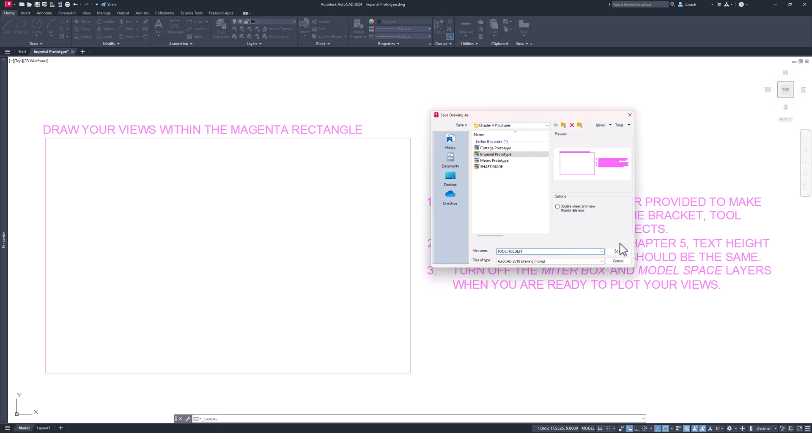The first thing you want to do is save this as - I'm going to save this as tool holder. Hit save here. And then I'm going to start by creating some layers.

Oh first, before I do that, let me set the units. The units is going to be decimal, which it already is, but the precision, I need to change that to 3 decimal places here. Hit OK.

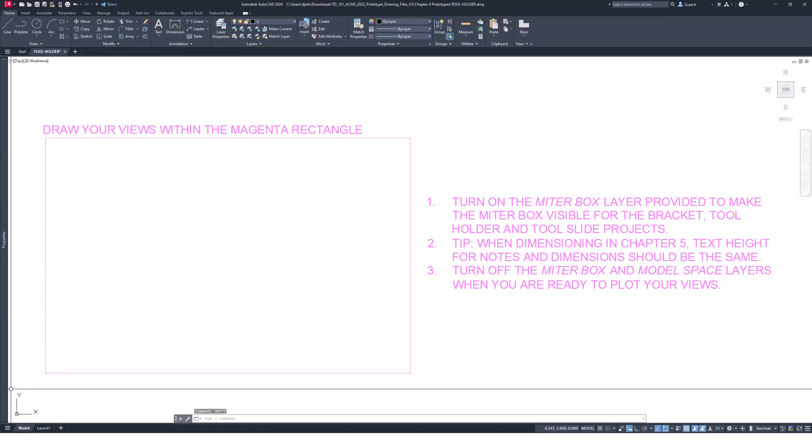We're already in the model tab, and the text style is already going to be on Arial, but let me just double check this anyway. So under the text style, yeah, we are, it's already set to Arial, so I'm just going to cancel out of this.

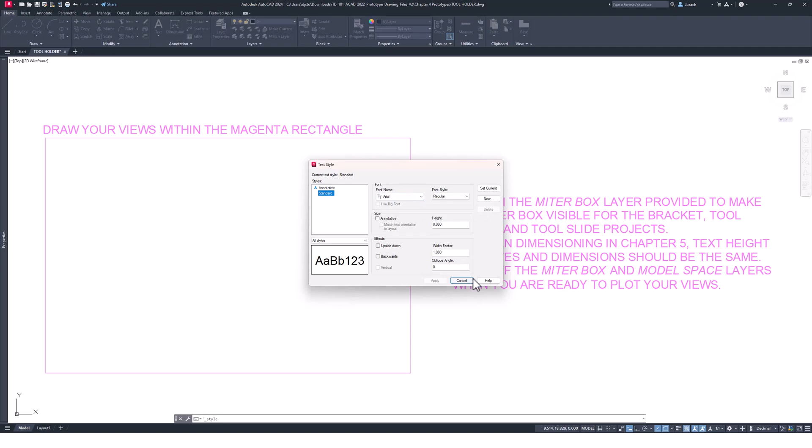So now we can start by creating some layers here. I'm going to go to layer properties, go to new. I want to name this first one visible, and it's going to be red.

Continuous, the line weight, I think it's just like on the previous one. So the line weight is going to be 0.6 millimeters.

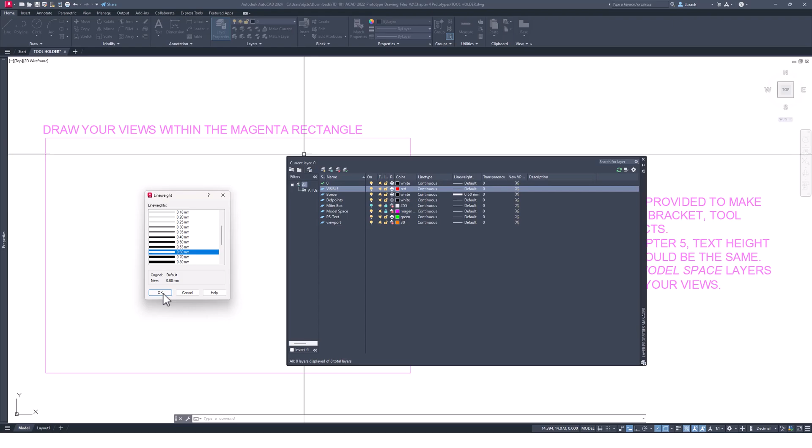And then I'm going to create a hidden layer. Name this hidden. The color is going to be blue. And the line type is not going to be continuous. We're going to need load. We're going to scroll down to where you see a hidden layer, which is this first one. I'm going to click OK.

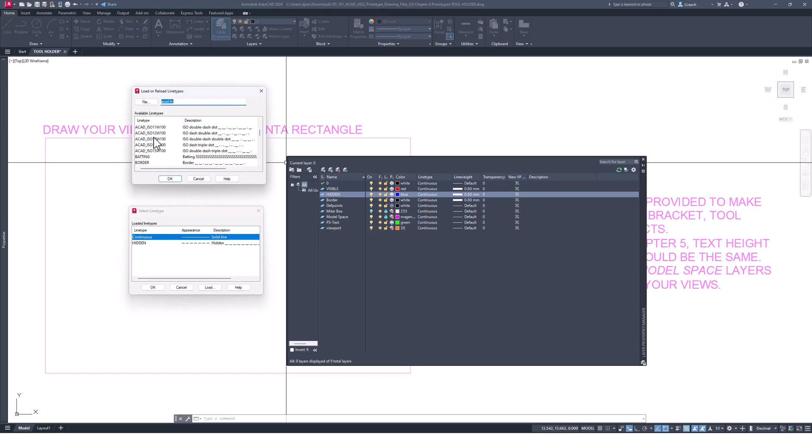I'm also going to load a center layer. I'm going to need that on the next one. So for my hidden layer, I want it to be - I must select this hidden and then go to OK. So now we have our hidden layer with a hidden line type. Our line weight is just going to be the default here.

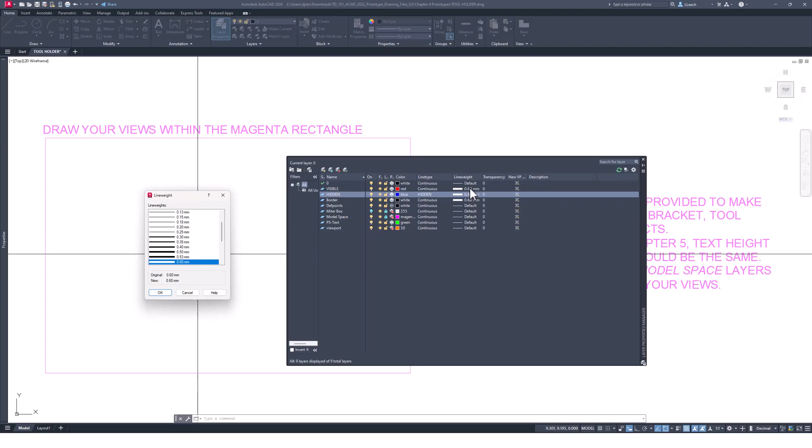And then while I'm here - let me create a new layer here. This one is going to be center. The color of that is going to be green. It's going to be a center layer. And then the line weight is default.

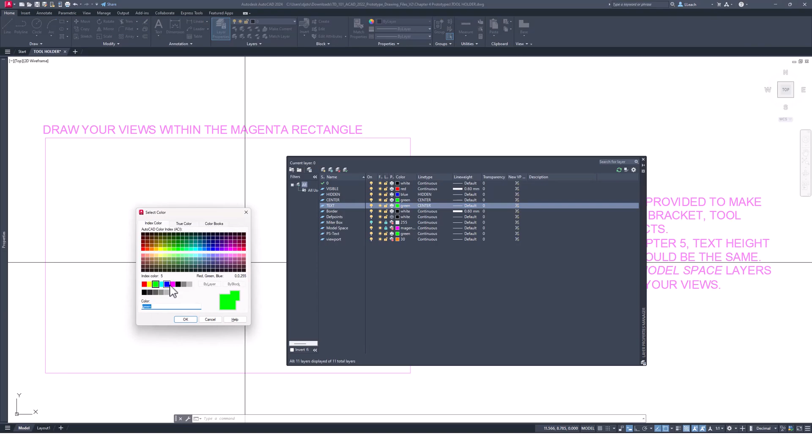Then we're going to create a text layer. And it's going to be magenta for that. Not blue, magenta. And it's going to be continuous. Where are we at? So not center, I want to make this continuous. And it's going to have a default line weight.

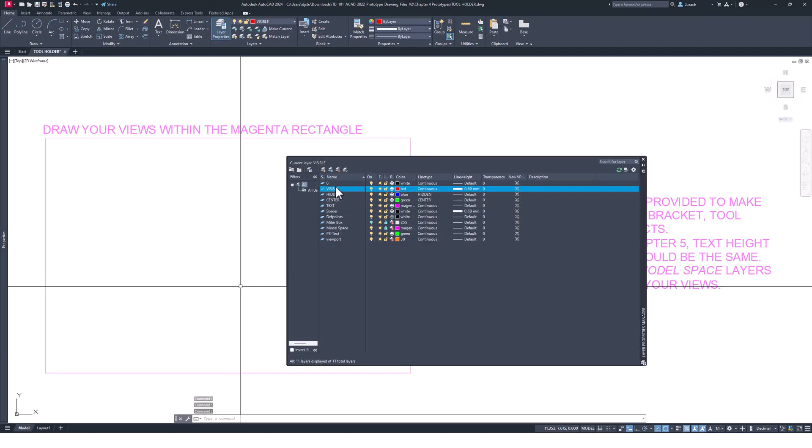So I'm going to double left click on the visible layer to make that the current layer. And then I'm going to click on the X to get out of this layer properties box. And then we're going to start by creating our front view of our tool holder.

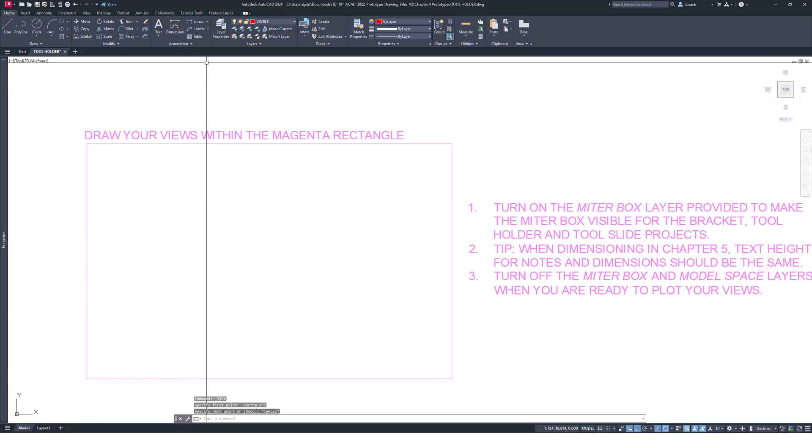So I'm going to go up to line. I'm going to make sure my ortho is selected and my object snaps is on. Wait, before I do that, I'm trying to get ahead of myself. I think what I want you to do is make sure you turn on the miter box layer. So click that little light bulb there.

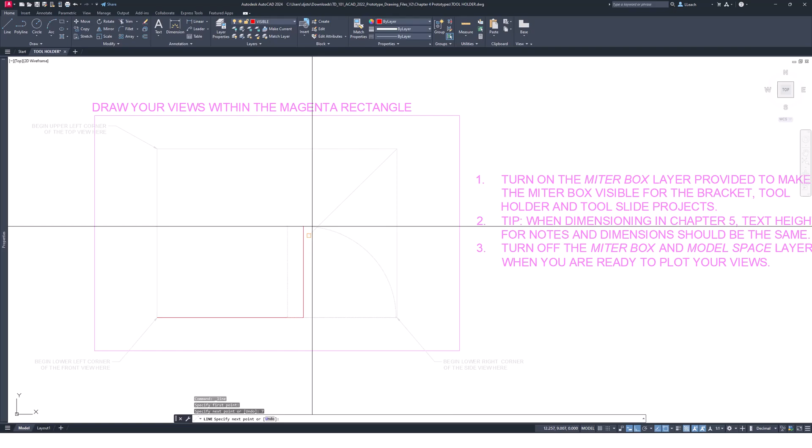It says begin lower left corner of the front view here. Yeah, okay, so it's very faint, but I'm going to start my line on this corner. And I'm going to drag it out to the right by a total of 7. I'm going to go straight up by - let's see, what should that be? Oh, 2.75.

Back over to the left by 7. Here I can just type in C for close. Type in C, press enter. So that kind of ends where we start.

And then I can offset a distance of 1 this bottom line up. I can also offset this top line down. Hit the escape key. I can offset by 4 this right vertical line over to the left. So I'm just trying to kind of block out this front view here.

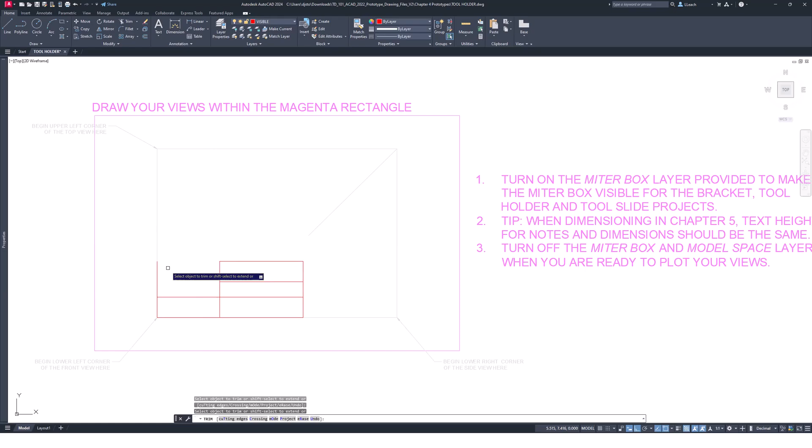Okay, then what I can do is I can trim this back. I don't need that. There's a line there. Okay, then I can offset by a distance of 3.25 this line over to the left.

Now I can also offset by 2.75, the same line over. So what I'm going to do now is draw a line from this end of this line to the end of this line. So our tool holder kind of goes over to the left, angles up to the right, and then goes straight over.

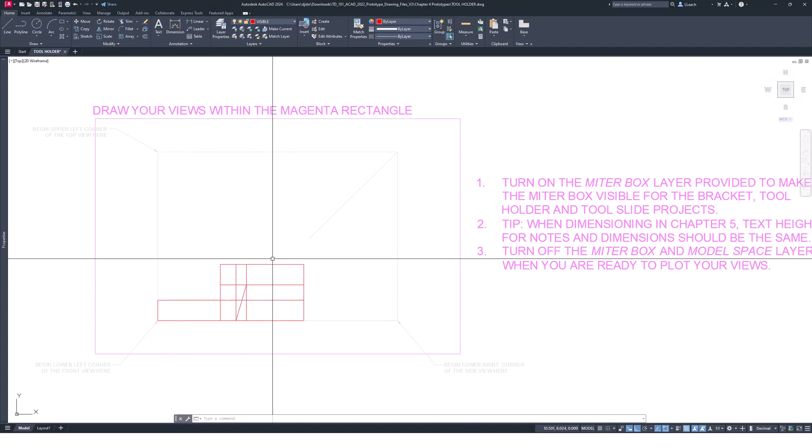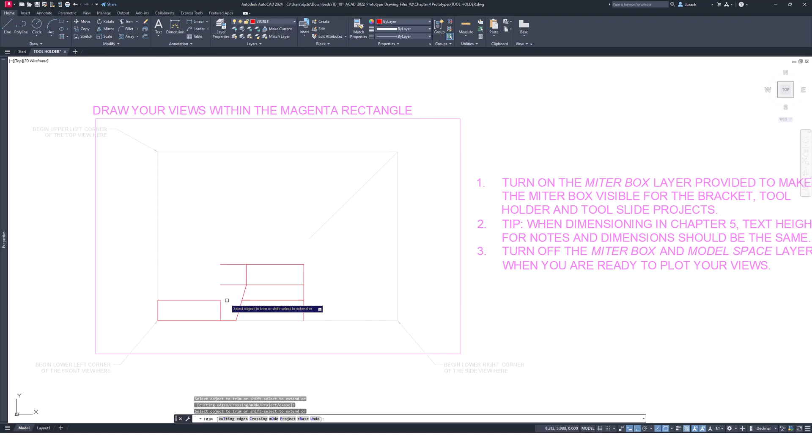So I'm looking at this, 3.5. Let me trim this piece and this piece. I don't need that anymore, I'm going to erase that. I'm going to trim this here. Erase this. I'm going to trim this piece. This piece goes to here and stops. I'm going to trim that piece. Erase this piece. I'm trying to clean this up so I don't have so many lines going all over the place.

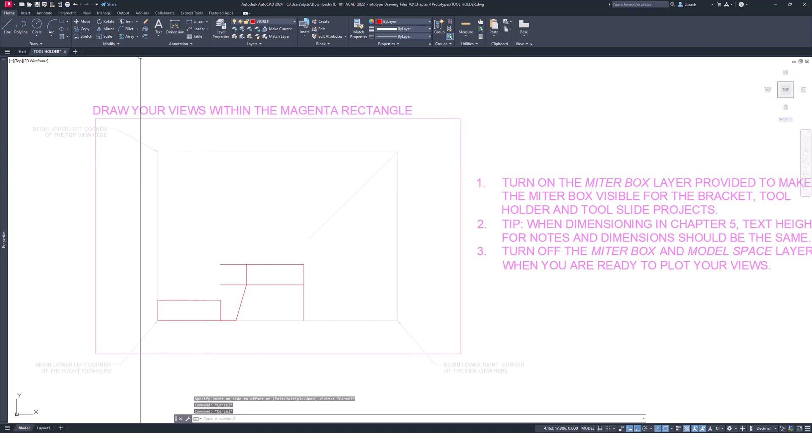And now I can offset by 3.5. Enter this line over to the left. I already did that, didn't I? No, I didn't. Let me offset 3.5. It was playing tricks on me. So there, that's what I want to do.

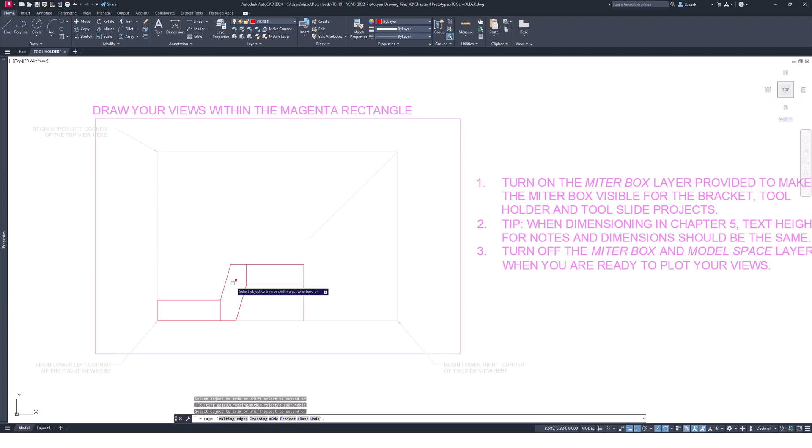So now I'm just going to draw a line from this corner up to this line here, right? And then let me erase this. I can trim out this piece, and this, and this, and that, and that. There we go, so now we're kind of rolling there. So that's kind of some of our front view.

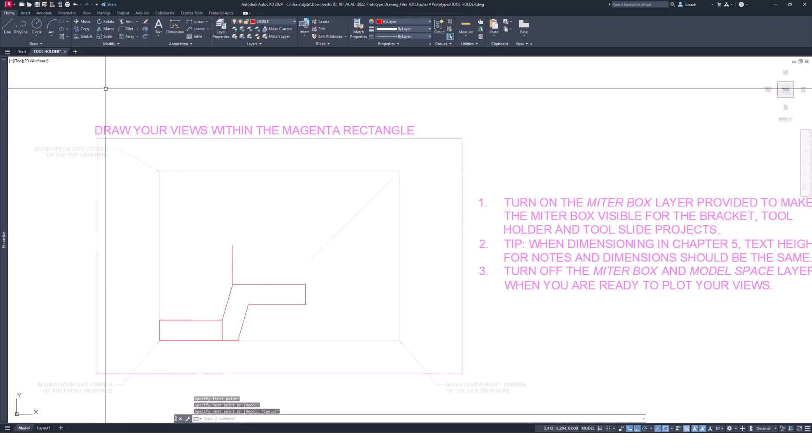Then I'm going to offset. Let me draw a line from this end, let me go up. I'm going to offset this 2 units over to the right. I'm going to extend this down. Trim out this, so this line here is going to be a hidden line. So I just selected it, I'm going to make it a hidden line. Now I can erase this.

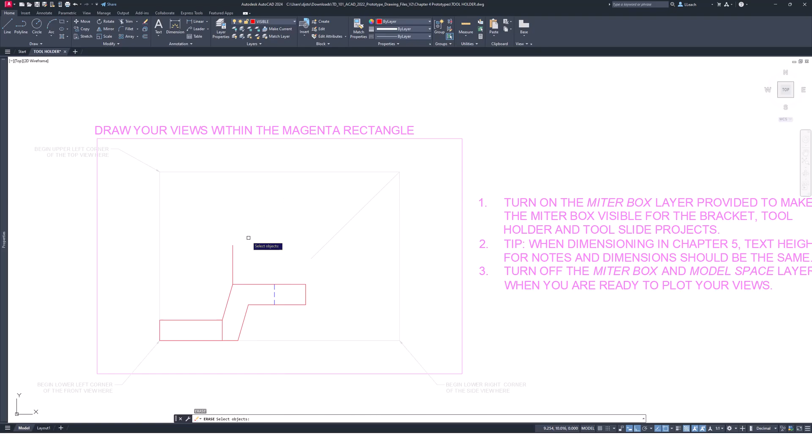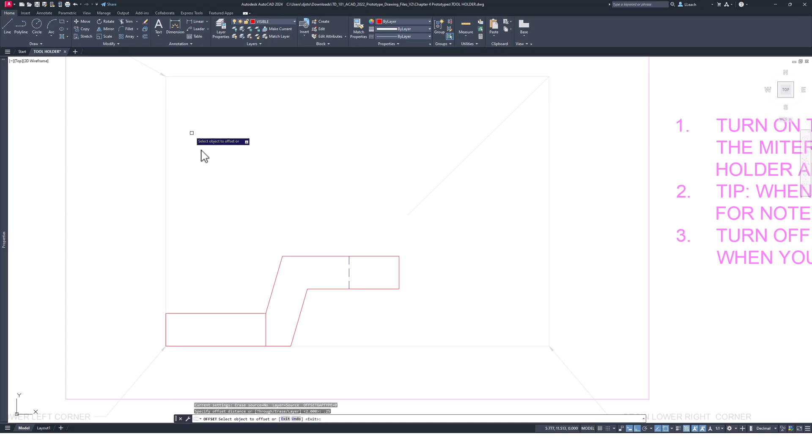And then what I'm going to do is, I know there's like a little extruded circular feature that rises up here. So I guess what I could do is offset this line by 0.25. So I know the height of that is there. But I'm going to go ahead and start drawing the top view so that I can kind of figure out where that hole goes better.

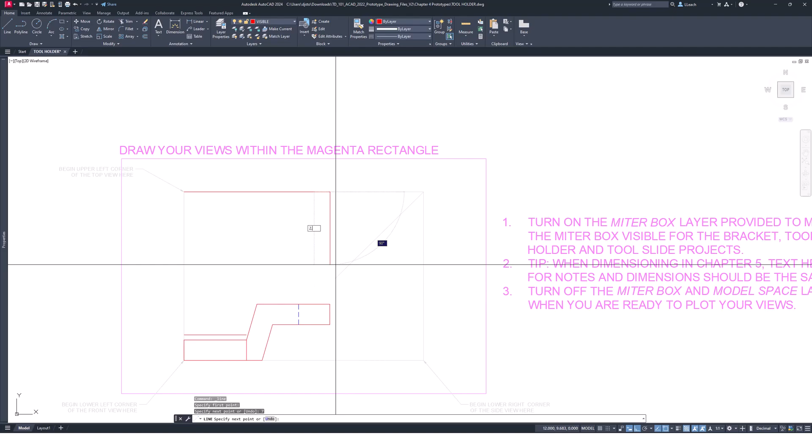So I'm going to start another line from this top corner, and it's going to go over 7 and then down by 2.5, over 7. Type in C for close, and then I can just kind of extend some of these lines here. That one goes there, from here to here.

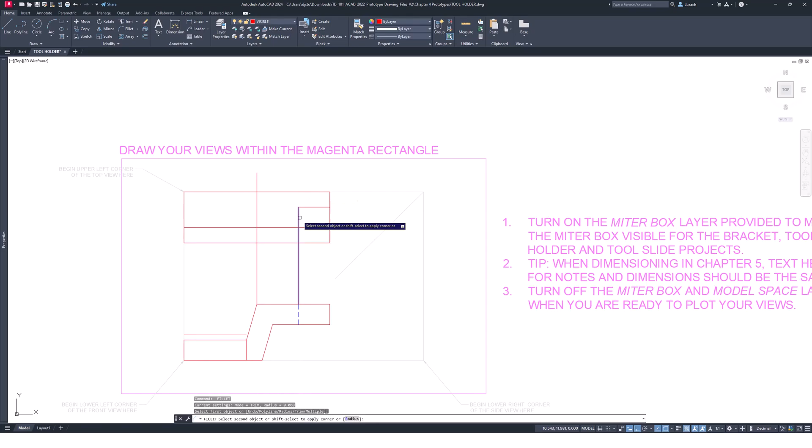It has a distance of 1 in the middle with 0.75 on the side. Okay, so I'm going to offset 0.75 here and there. And this should be 1. Let me check. Yeah, okay, so I can fillet this, or trim that out, however you want to do it. And then trim this middle line there, so that's going to go through like that.

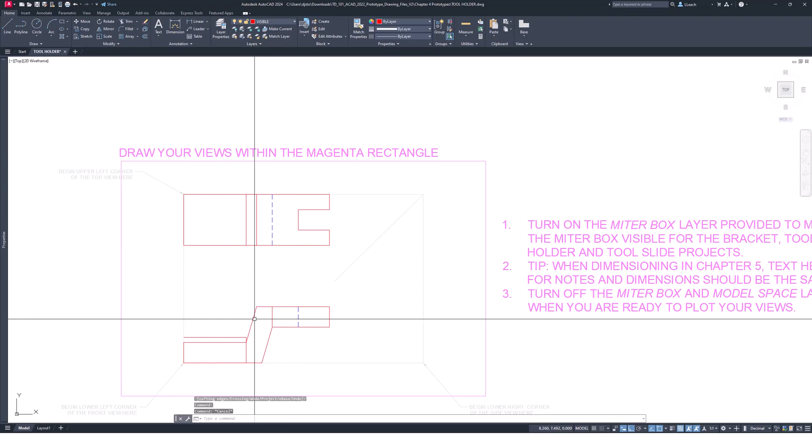And then there's going to be a line from here straight up all the way across. I'm going to trim out these. There's going to be a line here that's hidden underneath. I'm going to trim out that. I'm going to change this to a hidden line, I just clicked it, selected it. Click hidden line up here in the pull-down layers there. This one I don't need, I'm going to trim out that little snubby piece.

All right, so now to create this circle here, what I'm going to do is just draw a circle. And how can I best do this? Let me just draw a circle that has a diameter of, actually a radius. I might do a circle with a radius of 0.75. Wait, let me try that again, you didn't see all that, so let me do this again.

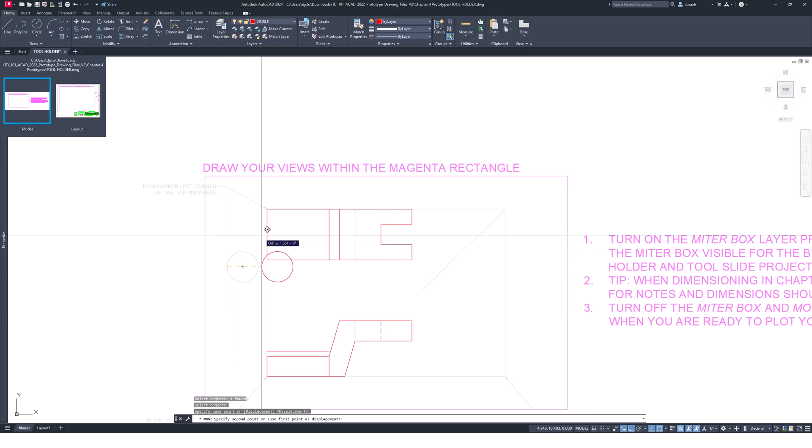I'm going to go circle, select the center point first, just draw randomly over here. Now I'm going to type in the radius is 0.75. All right, so now to move this in place, I'm going to move this circle from the quadrant here to the midpoint of this line there. If you don't have all that turned on in your object snaps, just make sure quadrant is checked, midpoint is checked, usually go with endpoint as well, center, tangent, intersection. Those are probably the ones I always usually have turned on or checked.

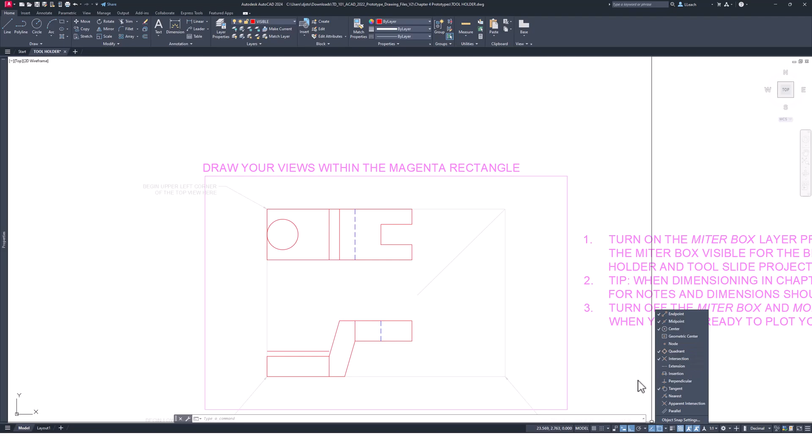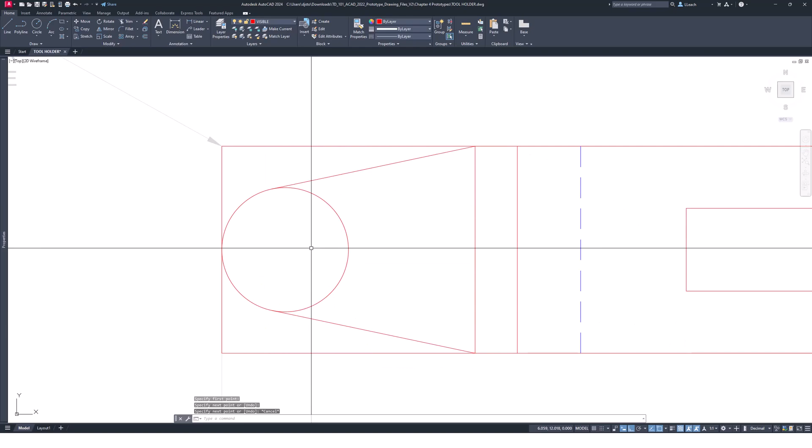All right, so then I want to draw a line from this endpoint to the tangent of this circle here. You can see a little circle with a line on top pop up, that tells you you're at the tangent point. So I'm just going to click that, hit escape. I'm going to draw a line from this corner up to the tangent as well. And then we can trim out this half circle. I can actually trim out this and this, erase this.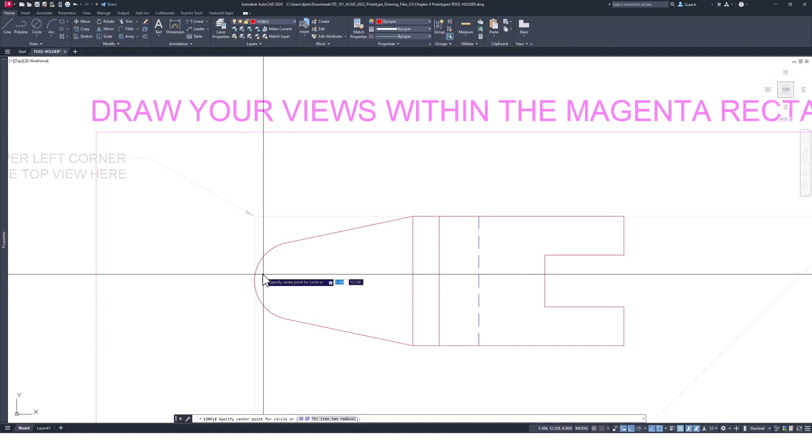And then there's two more circles I need. This is going to be a circle from the center, with a diameter of 1.25. I'm going to use the diameter option, and the center of it is going to be the center of where this arc is now. I'm just going to hover my mouse over to get that little plus that pops up, and drag this out. This is going to be 1.25.

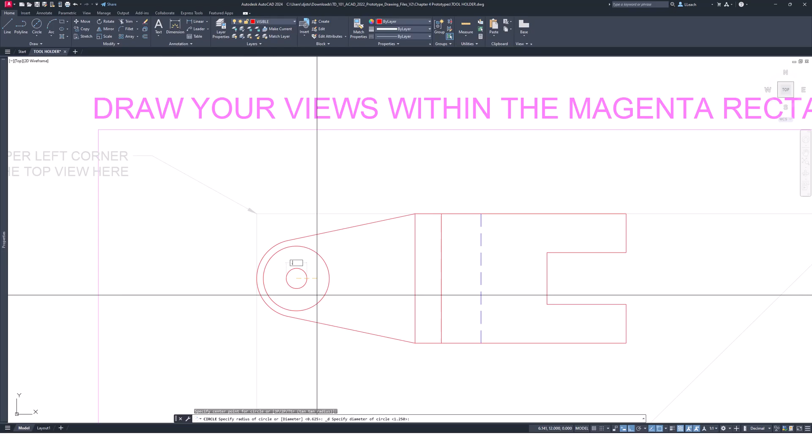And then I'm going to create another circle with this diameter option, same center, and this is going to be 0.75 diameter, like so.

Is that in the center? Let me check this. Yeah, that looks good. It looked kind of off a little bit, but anyway, my eyes are playing tricks on me. So there's that. There's our top view.

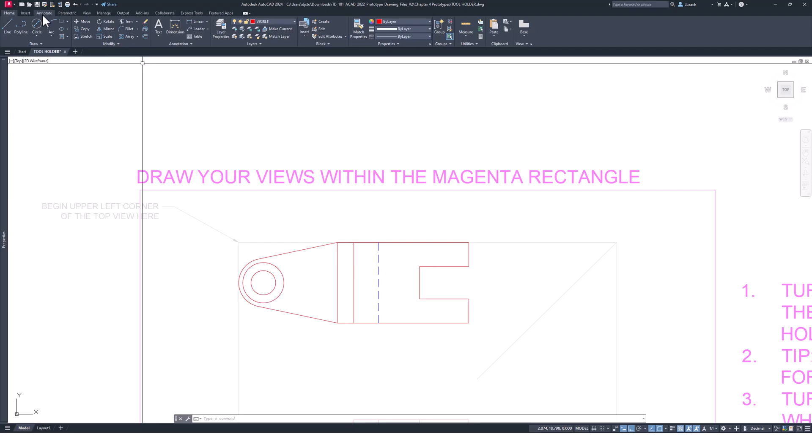Let me make sure that we got everything. So what I could do here is I am going to go up to annotate. I'm going to click on my center mark, click this, I can click this circle here, the outside one, and that covers them all. So there's that. And then I can project

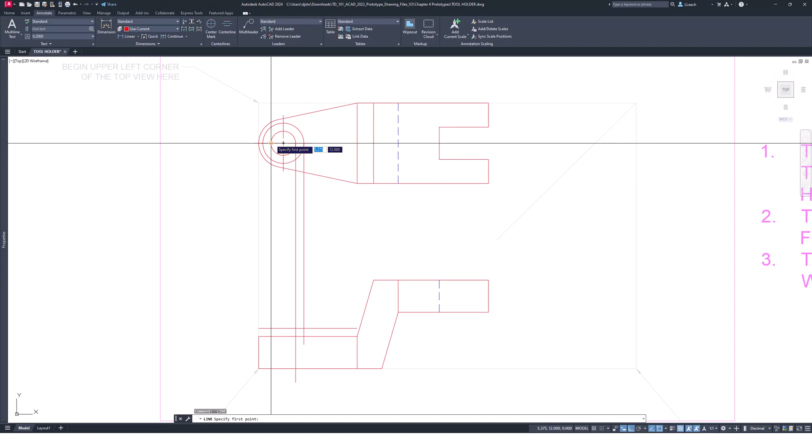the quadrants of this down. So draw a line from the quadrant here down, from the quadrant of this all the way down, from the quadrant of this all the way down, because that hole goes all the way through this part. And then from here, just kind of past the top face there. I don't know what I got going on with this crazy line here. This one, I don't need that.

Anyway, so then I can trim out these. I can trim out this and this and this. Also, I noticed that my background is turned white, which I hope that's not too hard to see for y'all, but

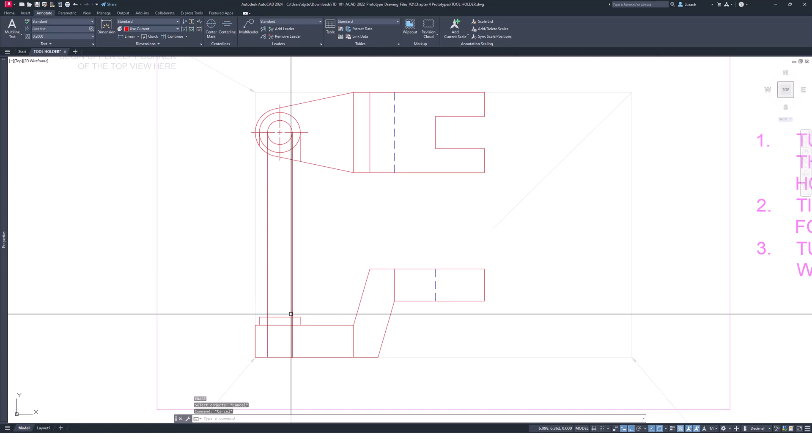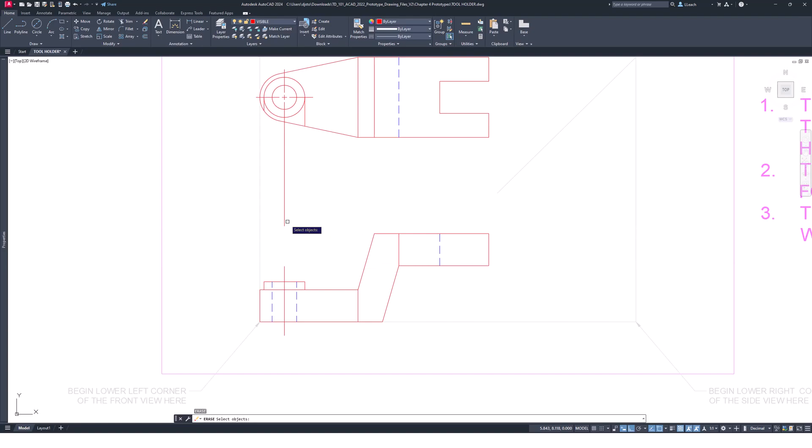trim out these. And then, so this line and this line is going to be, click on home, it's going to be a hidden line. There's going to be a line down the middle there. And I can BR for break. I'm going to break like the top of that line off here. This line needs to be a center line.

And I don't need this line or that line. Actually, this here needs to be on the center line too. See, center layer. So here.

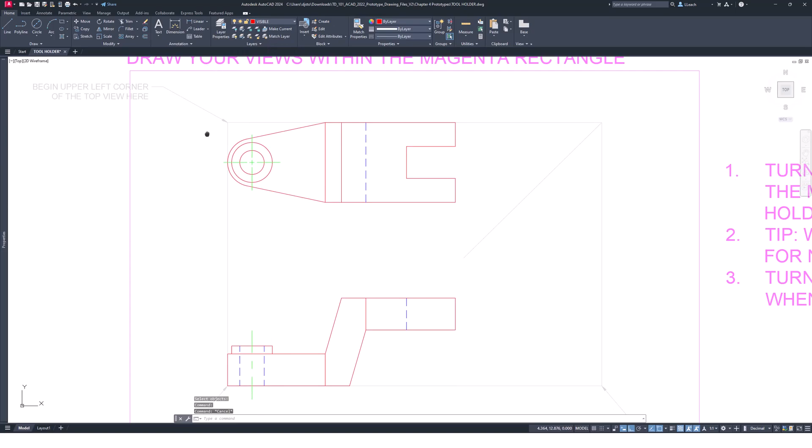So there's that. Okay, so now we just need to do our right side view. And that's going to be the tricky one because there's a lot of hidden lines going on behind the scenes there. But we'll get this.

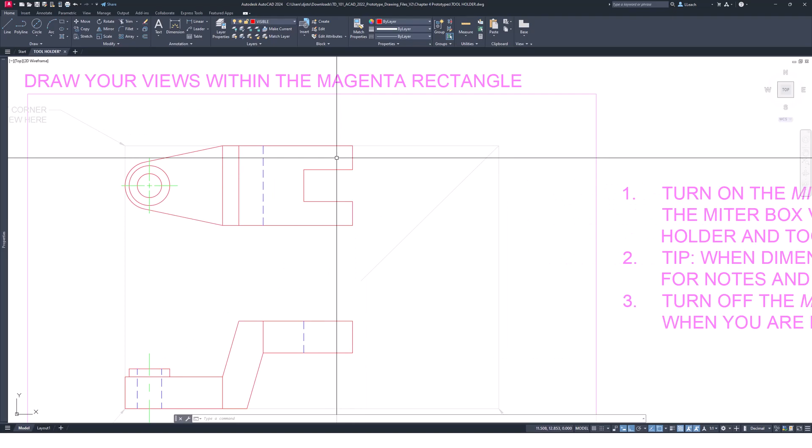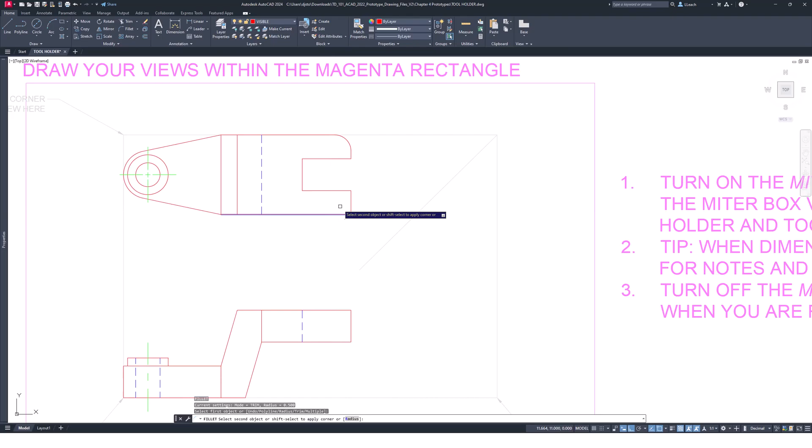All right, so also I noticed that I need to have a radius of 0.5 on these corners here. So I'm just going to type in F for fillets, press enter, and then type in R for radius. That radius is going to be 0.5, press enter. So I'm going to round off these two lines and press enter, select these two lines, and hit the escape key. So there is that.

And then now we can concentrate on our right side view. But I think what I want to do is, I probably should have done this from the start. I'm just going to right click. I'm going to turn my background to black.

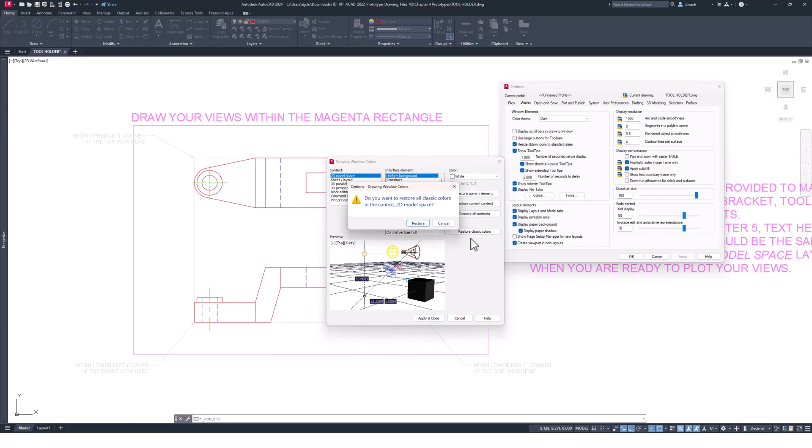I'm just going to go restore classic colors here. Hit apply. So you're probably like, yeah, you should have started that off from the start, you big dummy. Sorry about that. Let me hit OK here. So that's probably a lot easier to see. Anyway, if I get a lot of complaints, I'll redo it with a black background, but I'm too far into it now to start over.

Anyway, so let me just do this right side view. I'm going to go to my line, go straight up. This is going to be a height of 2.75, and it's going to go over to this left by 2.5, down 2.75, and C for close.

And then I can kind of start projecting some of these lines. So a line from here all the way over, and I can trim out that and that.

I'm going to project this line over past my angled line, and this one too, and go down. I'll draw a line from where those cross, go down, press enter twice, go down, and trim this out.

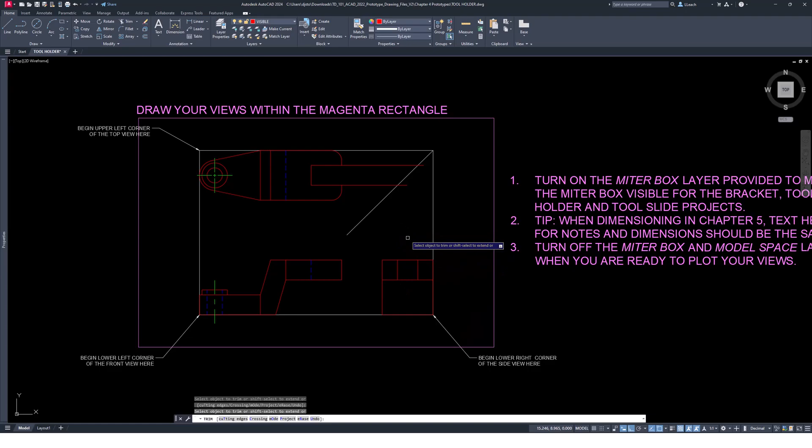That is going to be trimmed out, but it's not going to be a hidden line. This is going to be further back, but it's not hidden because you can see it. I don't know if that makes sense.

I'm trying to decide if this line here should be hidden. You'll see a line there, but it'll be further back. For me, I would probably put it on a lighter continuous line layer, but we don't have any of those, so we're just going to leave it as that.

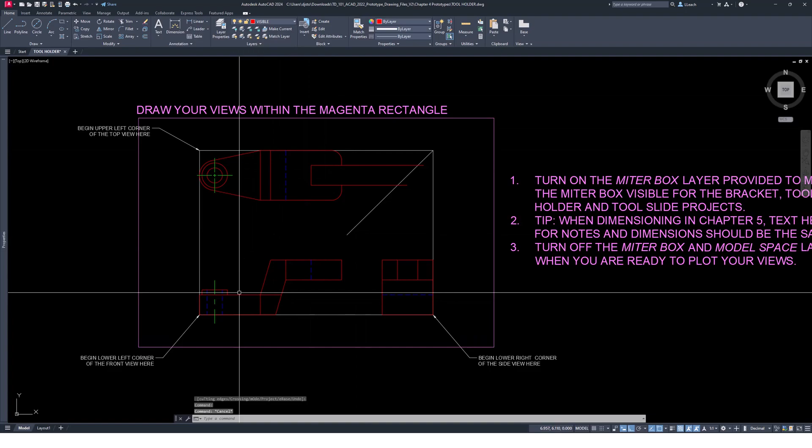What I want to do is draw a line from this corner all the way over. That's going to be a hidden line, so I'm going to trim out these and change this to a hidden line. You're going to see this raised circle as a hidden line behind it, and that hole that goes all the way through is also going to be a hidden line.

Let me project the top of this circle over, and then figure out where the edge of this circle goes. I know a circle doesn't have an edge, but from this quadrant straight over, I'm just going to hit this intersection and go down.

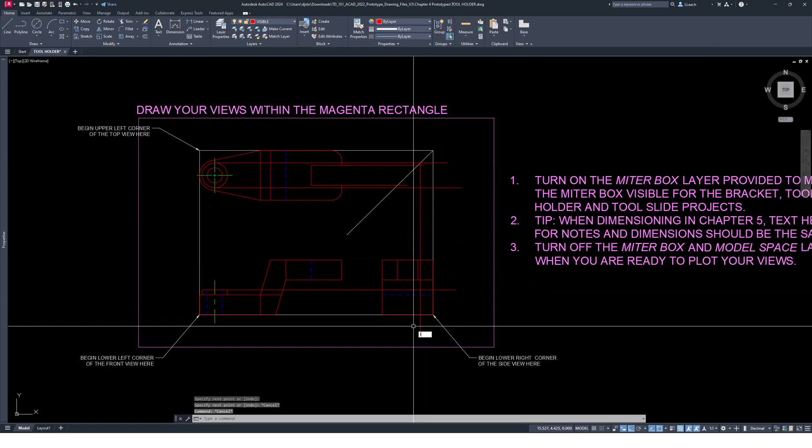I don't want too many lines going across here because I'll get confused. So from here down - let me get my thought here. I'm going to fillet radius. I need to put this back to 0, and then I can fillet this, and this is only going to go to that hidden line.

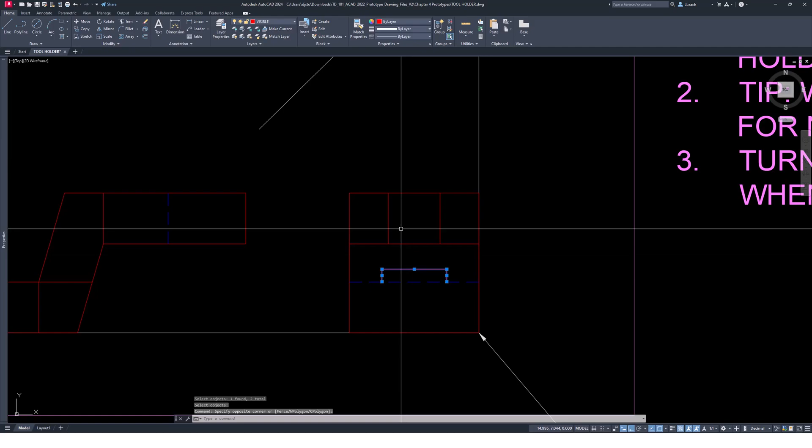Erase this and this. And then these lines I just selected are going to be hidden because it's behind this angled wall here. And then you're going to see - let me erase this and this.

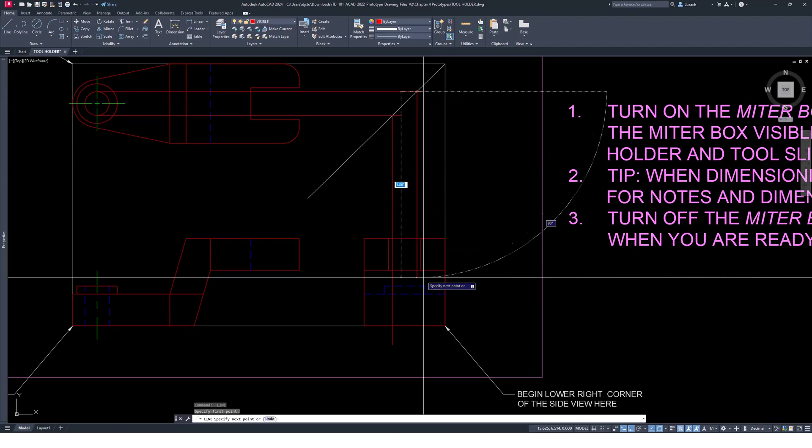I'm going to project from the quadrant of this inside circle over, same thing here, over, and go down. That is going to go all the way to the bottom. Just trimming out this - I don't need that or that. This is also going to be a hidden line.

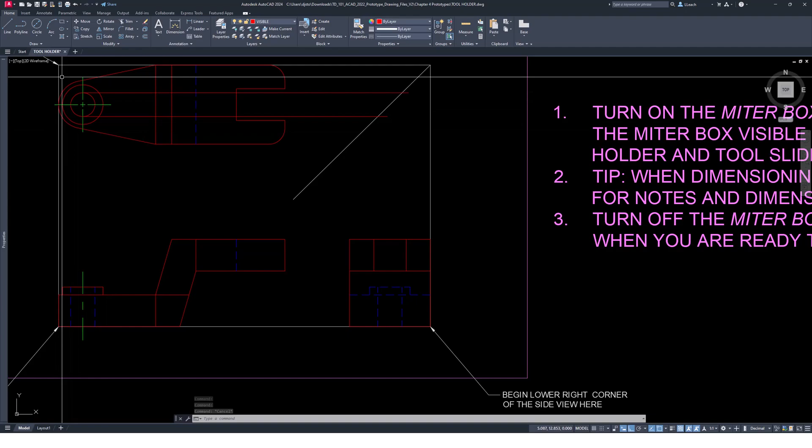Even though there's a smaller circle behind it, there's no flat piece to kind of project as hidden. So I'm thinking, what else do we need to do?

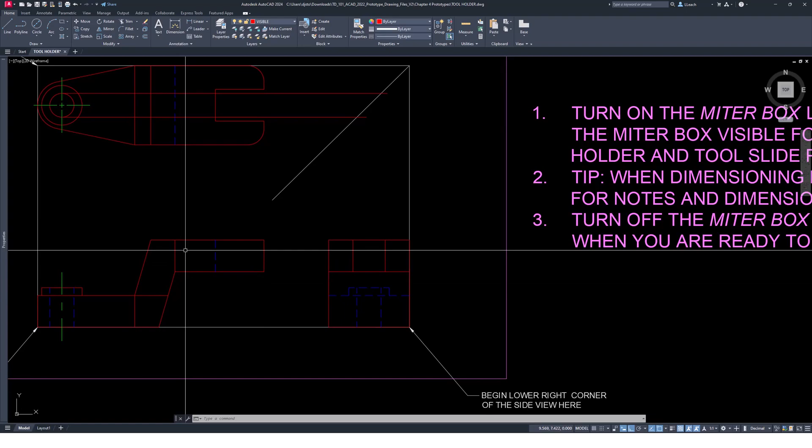If I'm looking here, you're going to see this angled piece. Oh, I need to trim out this right here - that doesn't go there. Get rid of this, get rid of this.

I need to draw a center line from here over, down. I'm just going to copy - CO for copy - this center line from this intersection to this intersection here. Erase this.

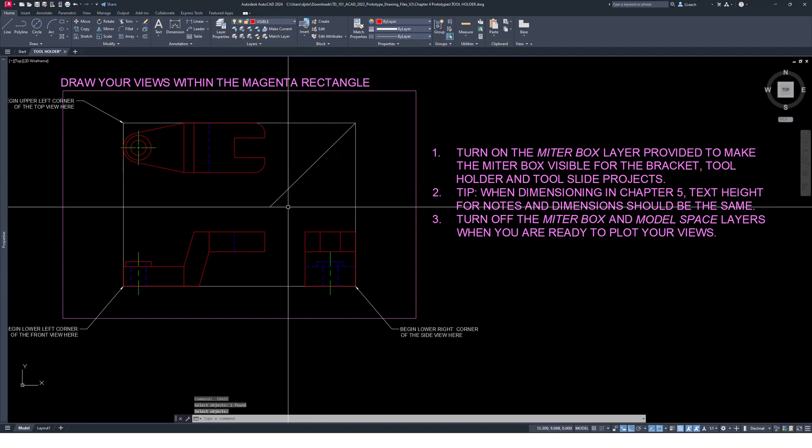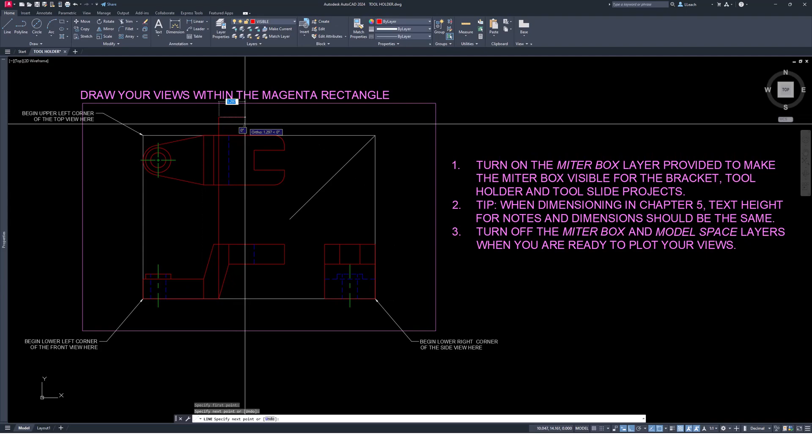Okay, so a few things I need to do. I need to extend this line here, this bottom edge, up into our top view. I'm going to trim off this and this, and change this to a hidden line.

I can actually grab this center line, this one, and just drag it all the way through here, because it's symmetric on both sides - you could do the same for this one here, but I'm going to leave that there. Oh, I don't need this anymore - get rid of that.

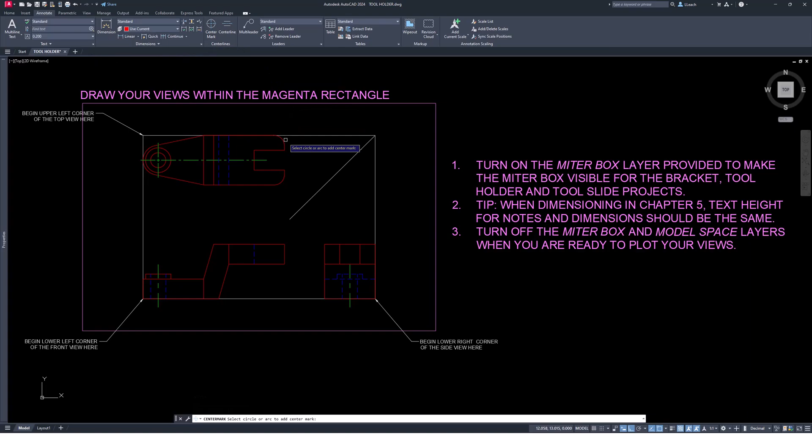So we could also go to annotate and do a center mark on these arcs here - so there and there. I could change these layers to, go to home, that would be center, like so. And I think we're good there.

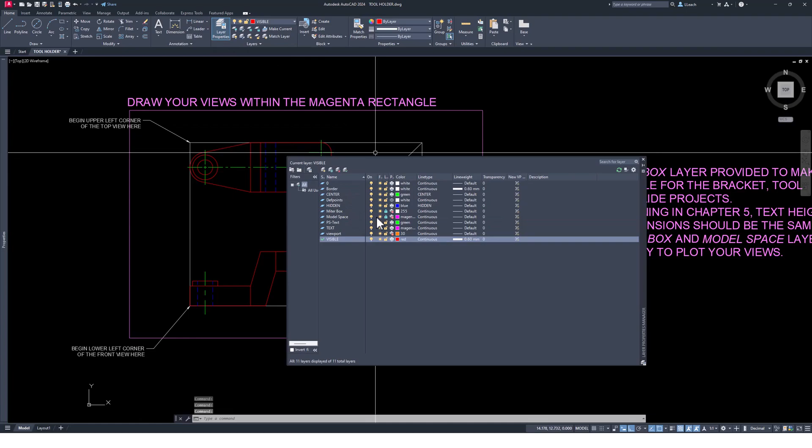Now what I'm going to do is go up to layer properties and turn off this miter box. What if I turn off model space too? What does that do? Yeah, so I turned off those two. So there is our completed views for our tool holder.